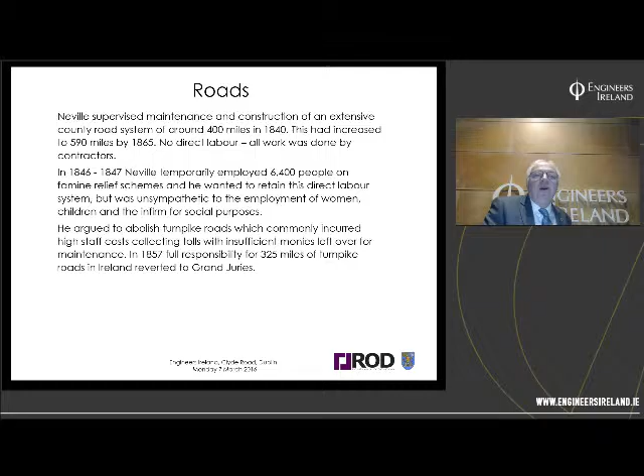He argued to abolish turnpike roads, which had high staff costs and usually insufficient money left over for maintenance. In the 1850s, responsibility for all remaining turnpike roads in Ireland reverted to the grand juries and individual county surveyors, so he was successful in that area. Now, the Irish road system was the subject of a quite interesting goods and passenger traffic survey in 1838.

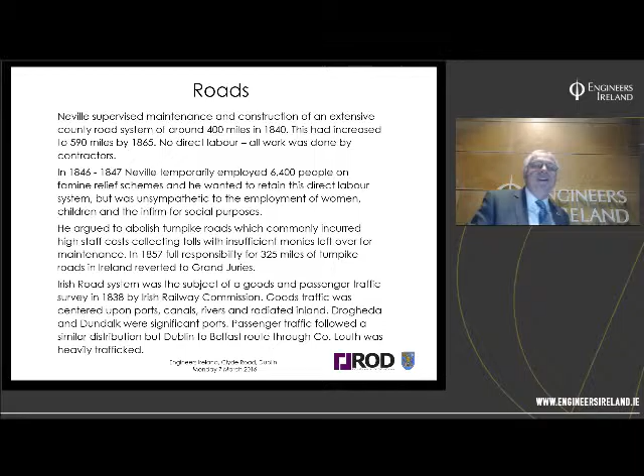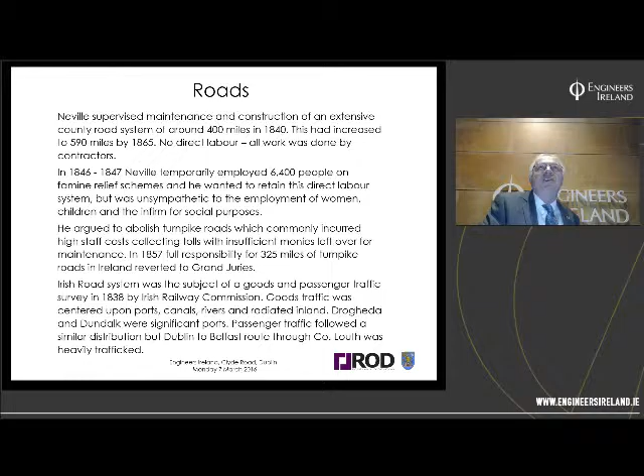This was by the Irish Railway Commission, and it gives a sense of what the status of Irish road traffic was like in the 1830s when Neville first took up his post.

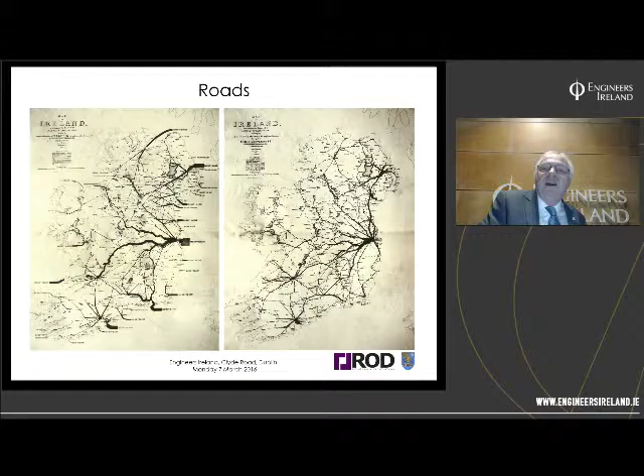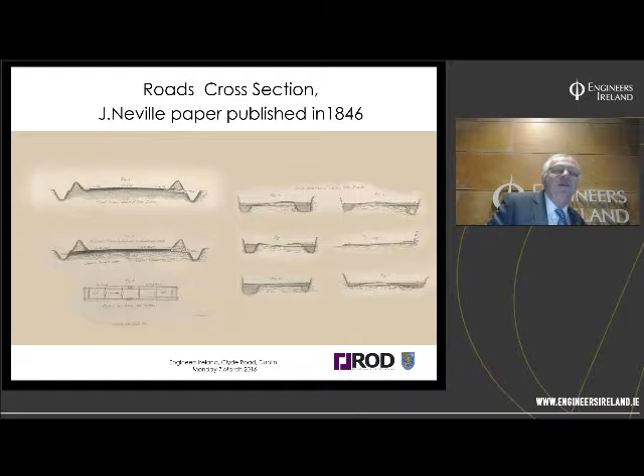Neville published some papers on road construction and how to maintain roads in 1846. He suggested that although currently a lot of roads were laid out with crossfalls of 1 in 24, about a 4% fall, he was arguing for crossfalls on the order of 1 in 48, about 2%. Any road engineers here would know that 2% is a common crossfall applied to current roads. So not much has changed in the 150 odd years since Neville proposed typical cross sections for roads.

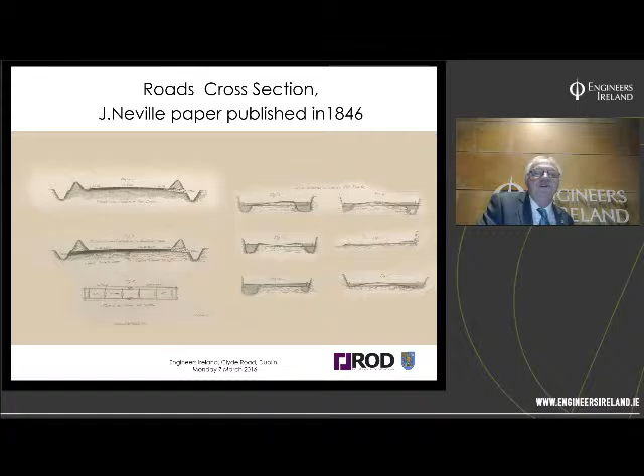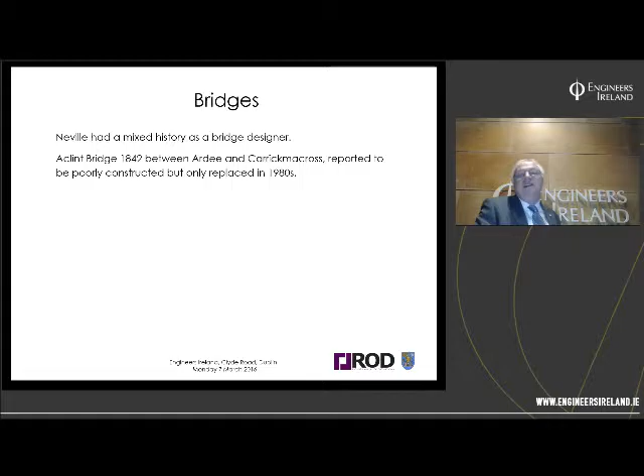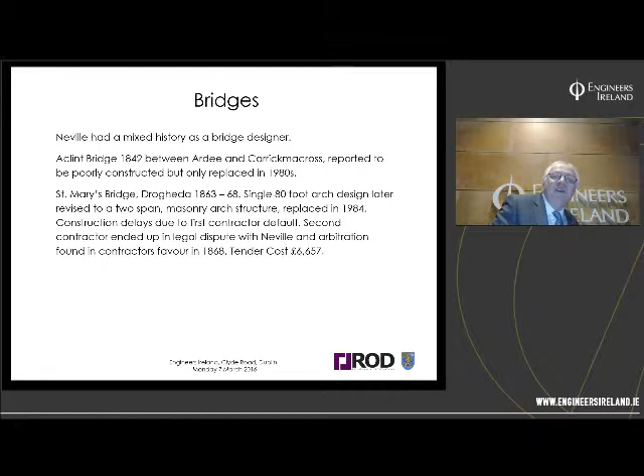Neville had a mixed history as a bridge engineer. An early bridge was constructed that was reported to be poorly built, but only replaced quite recently, in the 1980s. This was St. Mary's Bridge in Drogheda. He originally had a design for a 80-foot arch, quite a decent span for its day. This was later revised to a 2-span masonry arch structure and was only actually replaced in the 1980s. There were a lot of delays due to the first contractor defaulting. The second contractor ended up in legal dispute with Neville, and arbitration found in the contractor's favour. The tender cost of that bridge was nearly £7,000 in its day.

St Dominic's Bridge was another bridge, a rather crude timber bridge, replaced later in the 1890s by a steel structure, and that structure is still used by pedestrians to this date. He unsuccessfully competed for the new Carlisle Bridge in Dublin, built in the 1860s, now O'Connell Bridge.

This was a single span, 120 foot, 11 foot deep, wrought iron lattice girder structure designed by Neville, although it actually crossed between two counties, Louth and Meath. Neville was the only engineer acknowledged on the plaque on the bridge, so he is deemed the primary designer. It was built by a local contractor at a cost of £2,500.

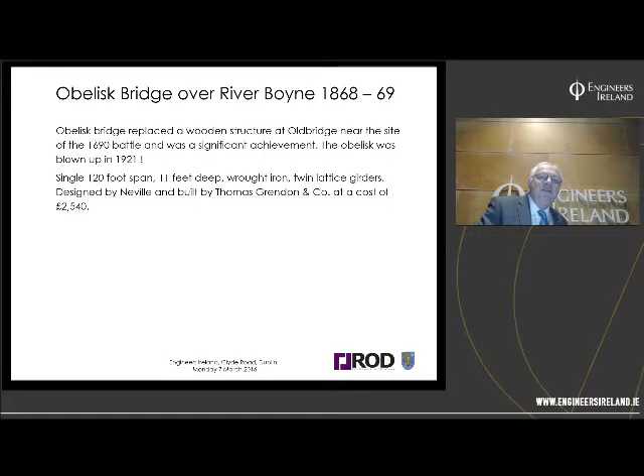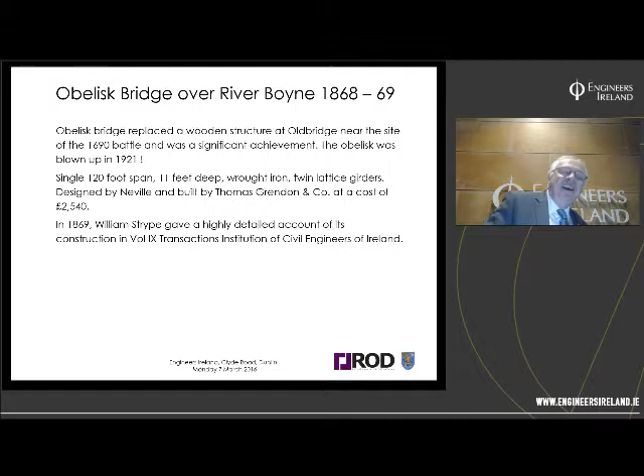There's a very detailed description and explanation given by William Strype in Transactions of the Civil Engineers of Ireland. If anybody has any interest in how exactly a lattice wrought iron Victorian bridge was constructed, you could do no worse than just read this. It's about an 18-page blow-by-blow, bolt-by-bolt account of exactly how it was built.

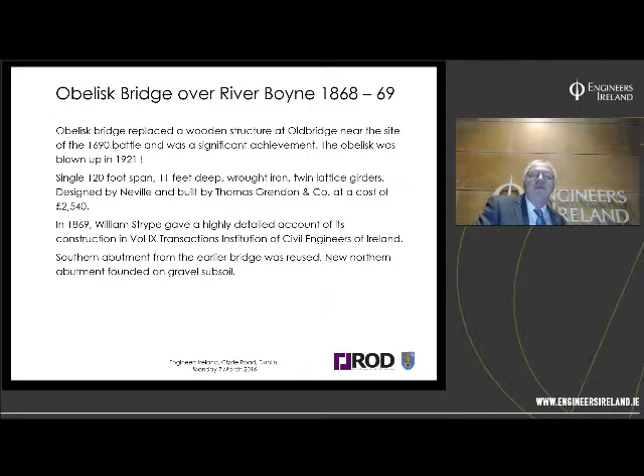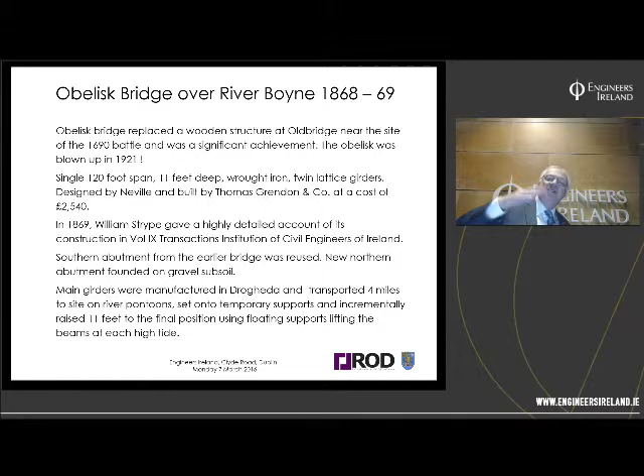The southern abutment was reused from the earlier structure, but the northern abutment was founded on gravel subsoils. Interestingly, the main girders were manufactured in Drogheda and transported on a barge 4 miles upriver on pontoons. They were set onto temporary supports, and the River Boyne was tidal at that location, so as the tide rose and lowered, they managed to incrementally jack up the system and raise it on temporary floating supports, lifting the bridge beams at each high tide. That's how the bridge beams were lifted into their final location.

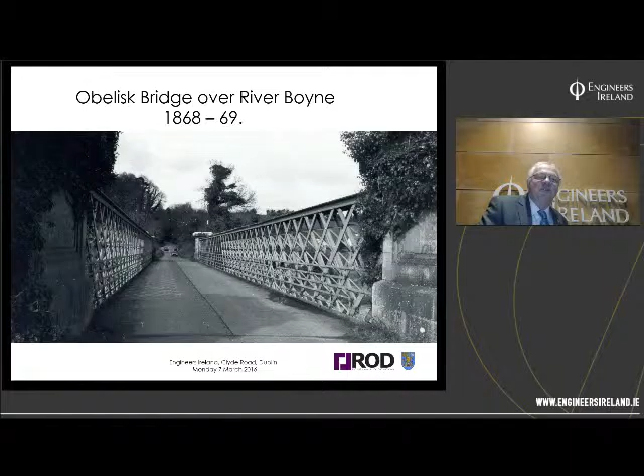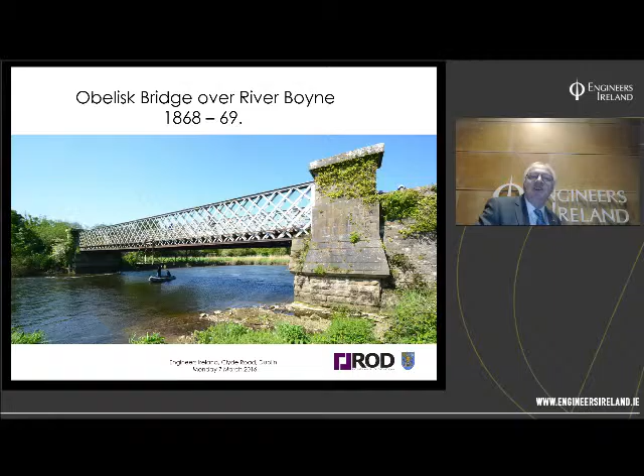Neville, unlike many other county surveyors, was not involved in the planning and construction of railways, unlike some county surveyors. Neville considered this a direct conflict of interest. He actually took legal action against railways on a couple of occasions to enforce reconstruction of railway bridges on the Dublin and Belfast Junction Railway in the 1840s.

John McNeill was the chief engineer, and very interestingly, at that time McNeill employed a young assistant working on the railways in Ireland, and his name was W.J. Macquorn Rankine. Mr. Rankine will appear later in the presentation.

Neville also opposed extension of railways into the quays at Dundalk, again arguing against the restriction of public access.

He didn't have a lot of luck with railways because in 1853 he was injured in quite a serious train crash near Straffan when the Cork-Dublin Express broke down and a goods train ran into the back of the passenger train that Neville was in. There were 16 fatalities and nearly everybody in Neville's carriage was killed. He was extremely lucky to survive with a broken leg and some other injuries.

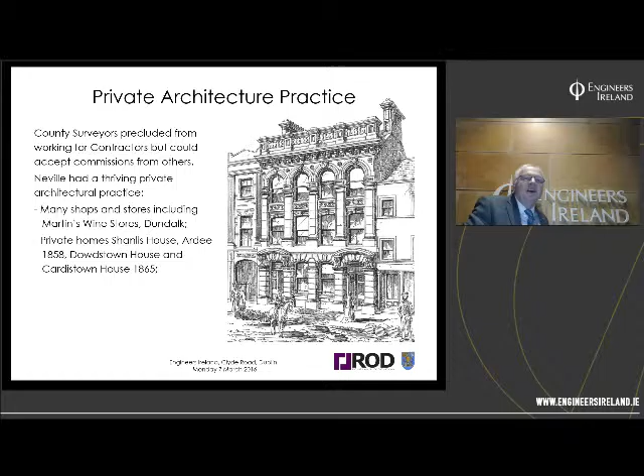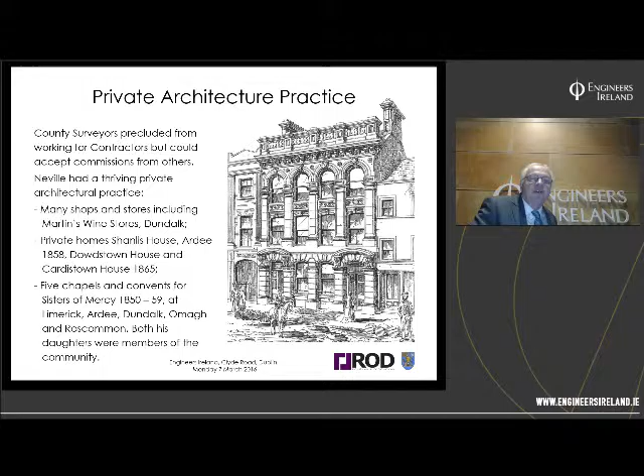He designed a number of shops and stores in Dundalk, including what was originally Martin's Wine Stores - this is a graphic of it, and this building stands to this day. He designed a number of private homes in County Louth: Shanlis House, Ardee, Dowdstown House and Cardistown House in the 1860s. He also designed, as architect, 5 chapels and convents for the Sisters of Mercy in various counties, and of course both his daughters were members of that religious community. This is a graphic of one of the convents of Mercy in Ardee.

He made a number of contributions to civil engineering education through his publications. When Neville was appointed, engineering schools were just beginning to be formed - an engineering chair in Glasgow in 1840, Trinity College Dublin in 1842. So civil engineering education was just getting going, and Neville came in slightly before there was a formal education. It caught the next generation after Neville, but not Neville himself. Many of those involved in civil engineering design basically read books, read papers, Encyclopedia Britannica - these were standard sources of information for its day.

Neville made a number of contributions through publications. He wrote a short paper on water pressures on cofferdams, and the paper that Trevor will talk about in far greater detail in the first Transactions of this Institution on earth pressure. He also did a graphic on road cross sections I gave earlier. He published a successful work, reprinted twice in London, on hydraulic tables, coefficients and formulae for discharge of water, and another hydrodynamics pamphlet in the 1850s. So his interests were quite broad, not just in roads but also hydraulics.

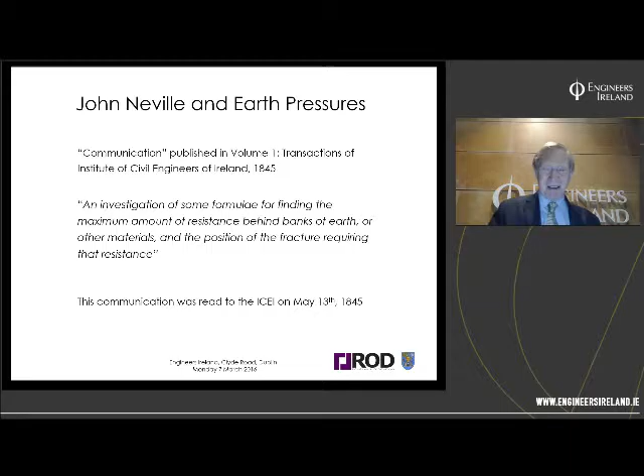I'm going to look at his contributions in the area of earth pressures as a sort of geotechnical engineer. He published this report we mentioned earlier, a communication in Volume 1 of the Transactions of the Institution of Civil Engineers of Ireland in 1845, called 'An Investigation of Some Formulae for Finding the Maximum Amount of Resistance Behind Banks of Earth or Other Materials, and the Position of the Fracture Requiring that Resistance.' It was read to the institution on May the 13th, 1845. I'm not sure if it was a Friday, but anyway, that's when he read it.

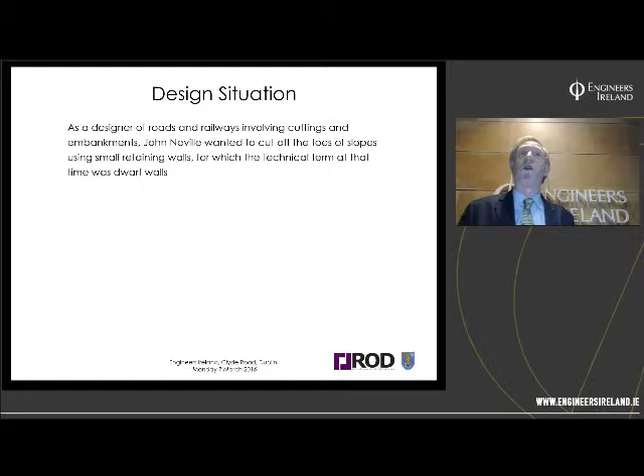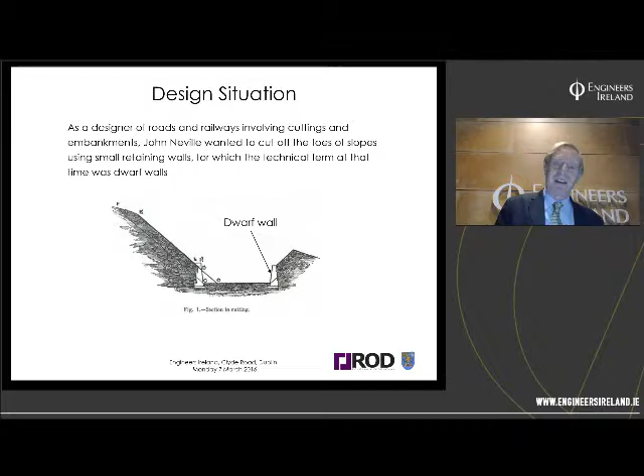Now, the design situation he was involved in—he worked a lot with cuttings and embankments, and he wanted to cut the toes of slopes using small retaining walls, for which the technical term at that time was 'dwarf walls.' So you have your cutting, and the dwarf wall is the little wall that gives you a bit more, reducing the amount of earth and increasing the cutting. The advantages of dwarf walls: they act as fences, the land required is reduced, there's less earthwork, and the toes of the slopes are neatly defined, protected and permanent. In those days this was important in districts where cattle or swine abounded, according to his paper.

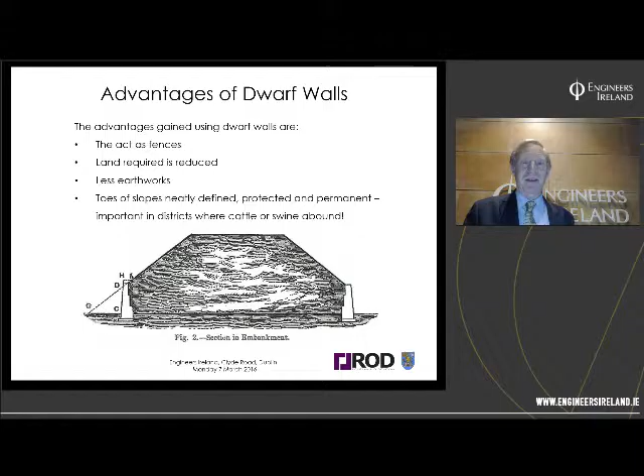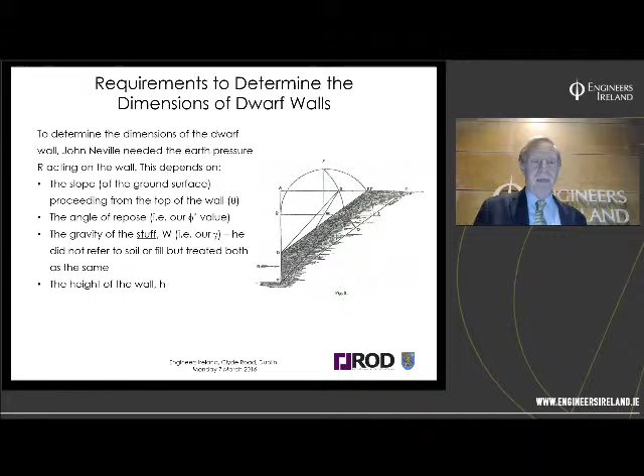Now, to determine the dimensions of the dwarf walls, John Neville needed the earth pressure R acting on the wall. This depends on the slope of the ground surface proceeding from the top of the wall—that's the angle theta; the angle of repose, our phi dash value; and the gravity of the material, W, in other words our gamma value. He didn't refer to soil or fill separately, but treated them both the same. The other parameter he needed was the height of the wall, and the height of the slope within certain limits—so there was the overall height and the height of the wall. But the problem was he didn't show any of his parameters on his figures—he has a lot of labels, but no parameters shown.

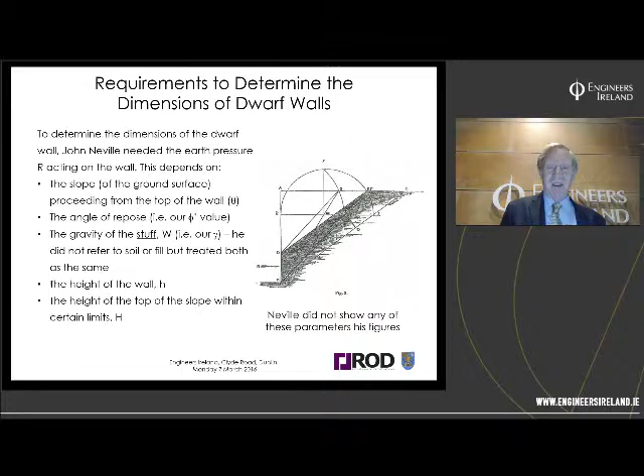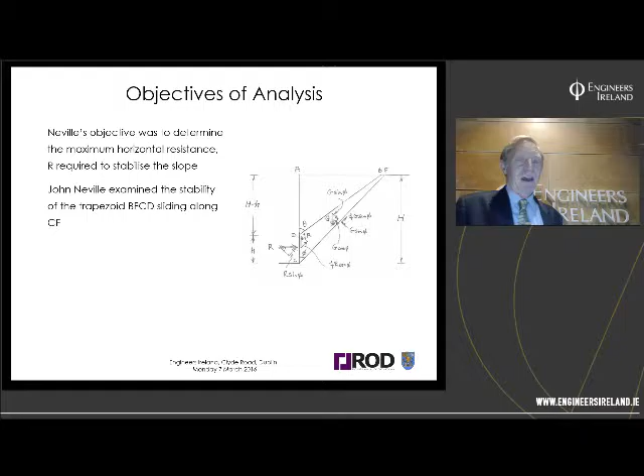Now, the objective of the analysis was to determine the maximum horizontal resistance required to stabilize the slope. And he examined the stability of a prism, BFCD.

So BFCD was the prism he was trying to analyze. Basically he had two triangles, that one there minus that one there. He was analyzing the stability of that, sliding along the failure plane, going up from there, C to F. So that was his failure plane, and the slope of the failure plane is phi. And it's not obviously our friction angle.

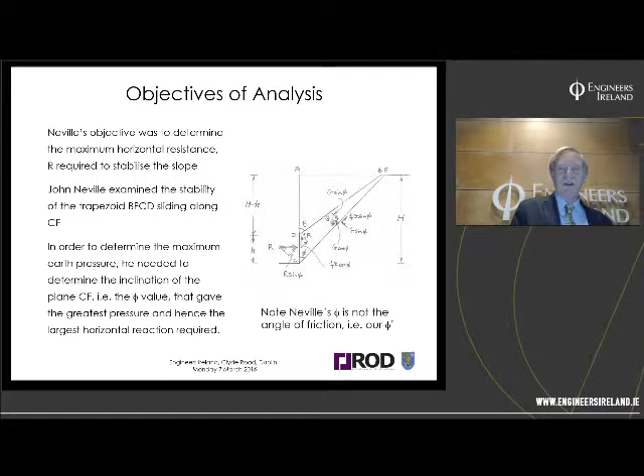We now call that our friction angle. So he was using the same symbol for something different in those days, which again causes a bit of confusion when you're trying to read it nowadays. So note, Neville's phi is not the same as our angle of friction, which I've called in the rest of this presentation phi dashed to avoid the confusion.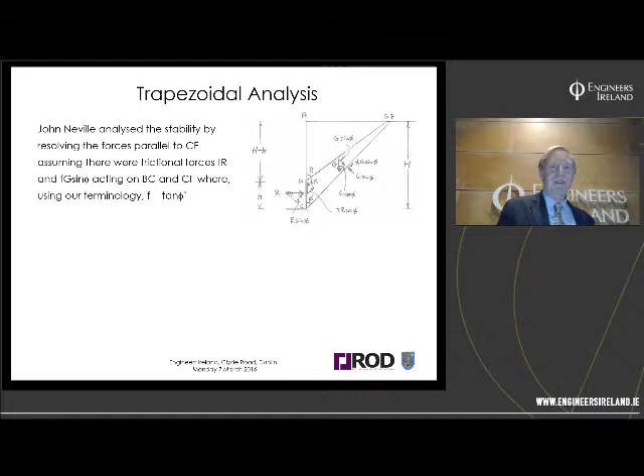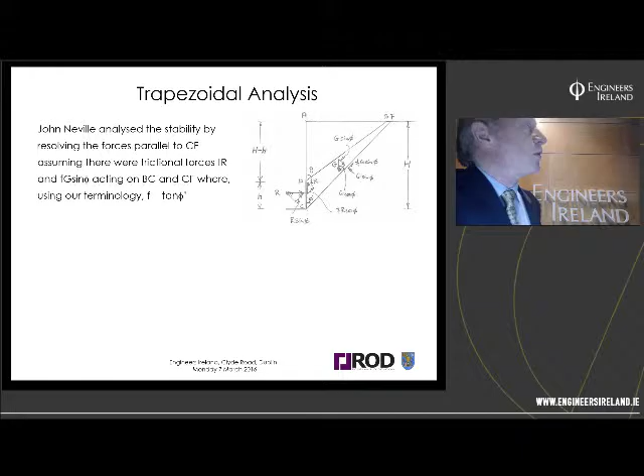Now, the trapezoidal analysis. He assumed in his analysis that there was friction on that slope and also behind the wall, and he had an angle of friction, F, or coefficient of friction, F. That's what that F is there and the F there. So we then resolve those forces parallel to that plane there to get equilibrium in that direction, and he got that equation. So you got the two components of that, and that force there and that force there, giving the equilibrium equation.

And resolving it to get the equation for R, which he's trying to calculate, you get this equation: G times 1 minus F tan phi over F plus tan phi. Now, since he needed the maximum earth pressure, he differentiated that R with respect to his phi angle, the inclination of the failure plane, and he gets this equation: tan squared phi plus 2 tan phi equals Fm plus m over F minus 1.

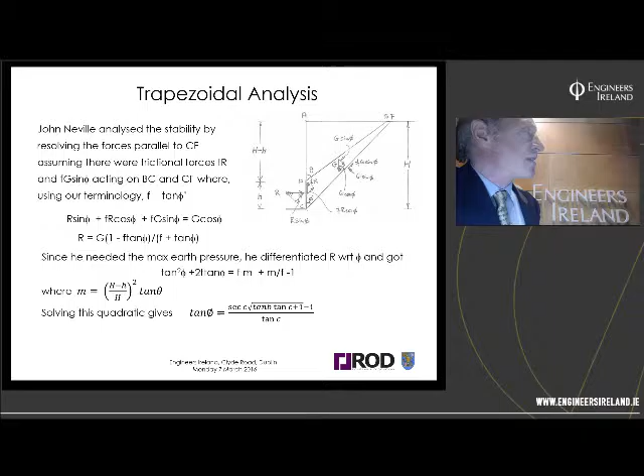Now, the equation for m is h minus h squared over h, minus h over h all squared, times tan theta. So m is a function of theta, and if you're going to be differentiating this, geometrically it gets quite complicated. But solving the quadratic equation here, he gets this equation for tan phi. Again, he was a great one for trigonometric functions.

Sec theta tan b times square root of tan b tan c plus 1, minus 1 over tan c. And he made a substitution here: tan b is equal to m, which is like what we had before. So tan b equals h minus h squared, h minus h over h all squared, times tan theta. And c then is the complement of the angle of repose, so that tan c up here is 1 over f, 1 over tan phi.

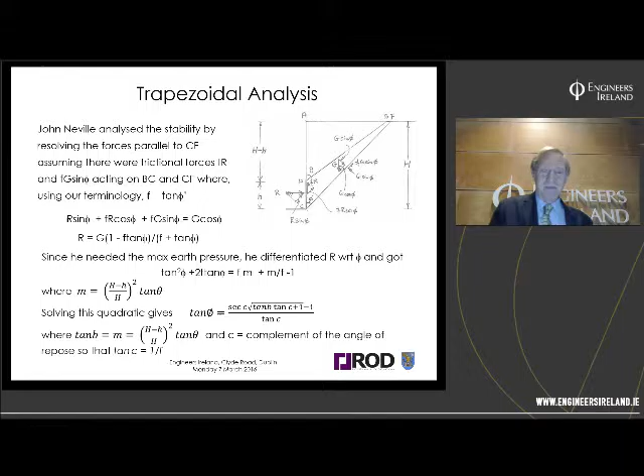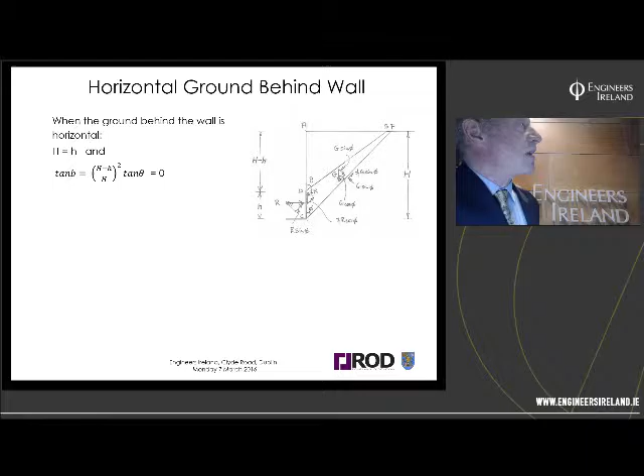And if the ground happens to be horizontal behind the wall, so we bring our h up to the full height, then h is equal to h, and tan b then becomes 0, because you get tan theta of 0, so that becomes 0. And the equation for tan phi, which you're trying to find, reduces to this: tan phi equals sec c minus 1 over tan c.

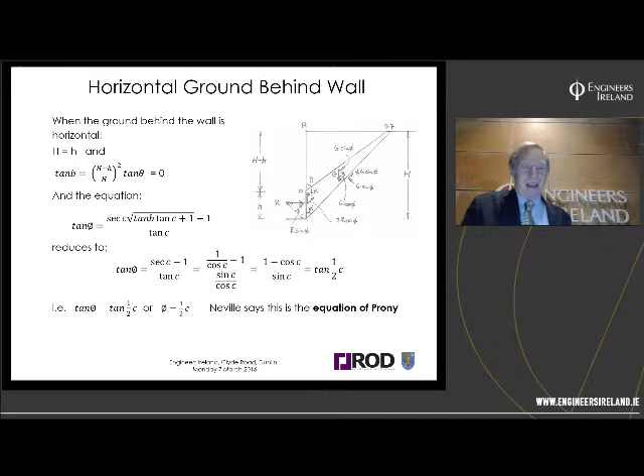Now, he's a great man for his trigonometric identities as well, so he knew that that gave him tan 1/2 c, which is the complement of the angle of friction. And if tan phi is equal to tan 1/2 c, then phi is equal to 1/2 c. And he says in his paper that it's the equation of Prony, and it's the inclination of the plane, CF, giving the maximum value of R, the active earth pressure.

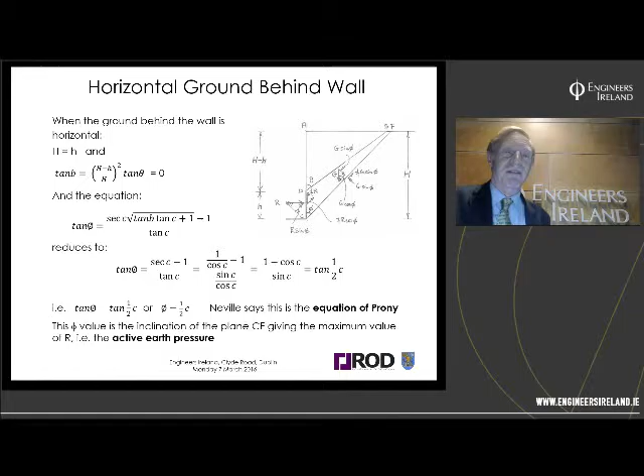So how does that then compare to what we have today? Or who was Prony? Well, first of all, let's look at Prony. Who was he and what was his equation? Prony, Gaspard de Prony, born in 1755 and died in 1839.

So a lot of things were happening in engineering around this time, the end of the 1700s, beginning of the 1800s. He was one of the founders of the École Polytechnique, and the first professor of mechanics in that school, and in 1798 he became the director of the École des Ponts et Chaussées. His two books on hydraulics and one on mechanics were widely used in French engineering schools. So the engineers who set up engineering schools, their equations obviously were known outside of France. Maybe they not only spread the revolution, they also spread engineering throughout the world, it seems.

And then in an elementary course in civil engineering by M. Sganzin, he states: Prony demonstrated in his Mécanique, and formerly in his memoir printed in 1802 for use of students, that the position of the differential prism at maximum pressure is such that the inferior surface makes with a vertical line an acute angle, which is equal to half the angle the Earth naturally takes.

Now that confused me a bit at the time, because he makes with the vertical an acute angle. So he's talking about this angle up here, the phi angle. It's equal to half the angle the Earth naturally takes. Well, the Earth naturally takes an angle we would call phi dash, but what he meant was angle to the vertical. So he meant the half c there.

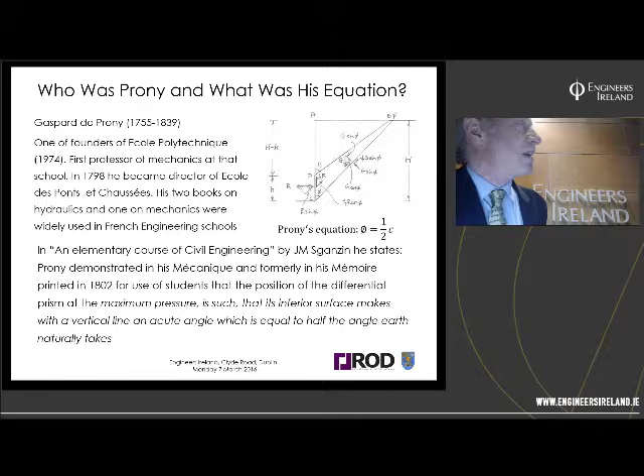So he's referring to the angle, and that's Prony's equation. Phi is equal to half c. So he's really talking about half the angle with the vertical.

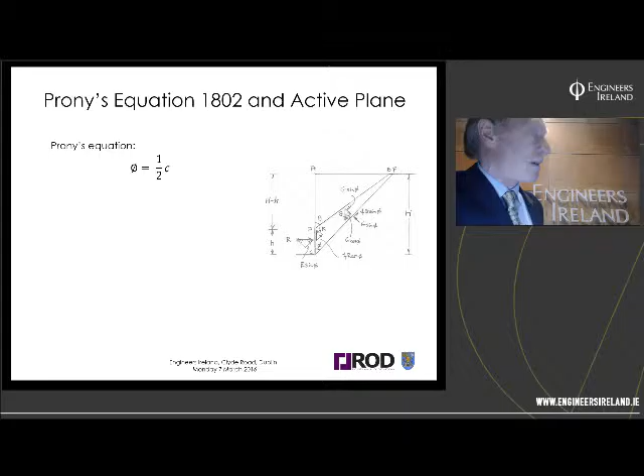Now, if we take this angle, how does it work out with the orientation of the friction plane? Phi is equal to half c. So expressed in our commonly used symbols today, with alpha for the inclination of the slope from the horizontal and phi for the angle of friction, that gives us...

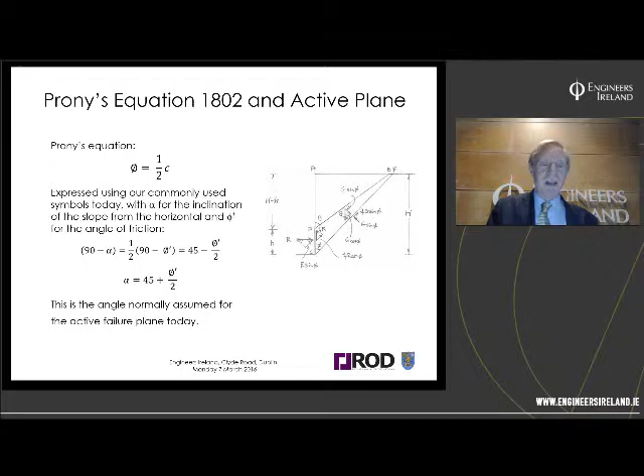90 minus theta, or 90 minus alpha, is a half of 90 minus phi, and that's equal to 45 minus phi over 2. If you rearrange that, you get alpha is equal to 45 plus phi dash by 2. And that's the expression used today you expect to get for your failure surface, 45 plus phi dash by 2. If you did a triaxial test, you'd expect to get the slope failure at that angle. So this is the angle normally used today for the effective angle, the active angle of failure.

Now Coulomb, in 1776, was a French physicist. He's probably better known for his work on electricity, Coulomb's law, and other areas, but he was also involved in geotechnics.

In 1764, he was sent to Martinique in the West Indies, where he was put in charge of building a new Fort Bourbon. And he published his paper, Essai sur une application des règles de maximis et minimis à quelques problèmes de statique relatifs à l'architecture. I think there should be a few accents in that. I copied it without, and the one I copied it from had no accents on it, but we'll leave it.

And this is the first study of the problem of lateral earth pressure on retaining walls published anywhere that used limit equilibrium theory, considering the failing soil block as a free body to determine the limiting horizontal earth pressure. In other words, to use a wedge analysis, which Neville used not long after that.

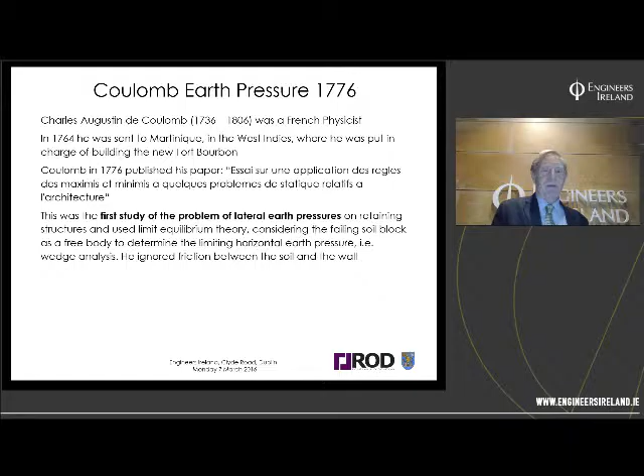But he, in his analysis, ignored the friction between the soil and the wall. Also, his paper was not very readable. He used lengths rather than angles, so it was very intractable.

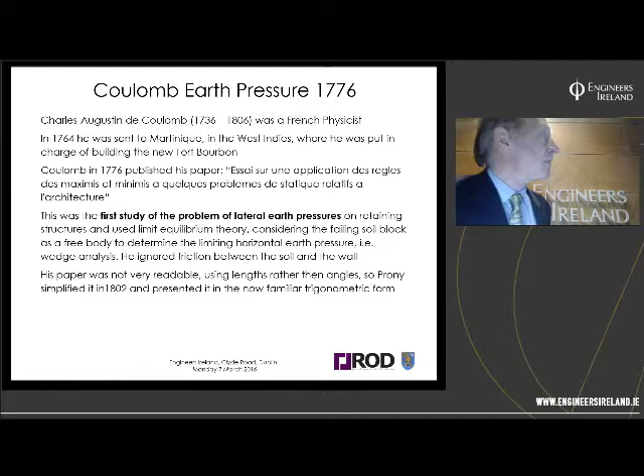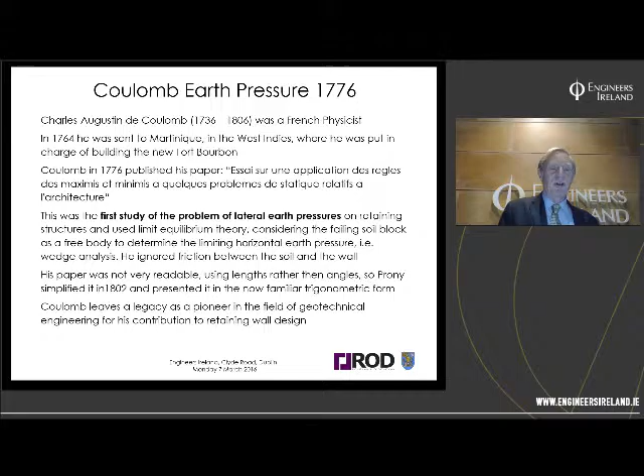And Prony, who took up his work, simplified it in 1802 and presented it in the now familiar trigonometric form. But Coulomb leaves a legacy as a pioneer in the field of geotechnical engineering for his contribution to retaining wall design. And his name is one of the 72 names inscribed on the Eiffel Tower.

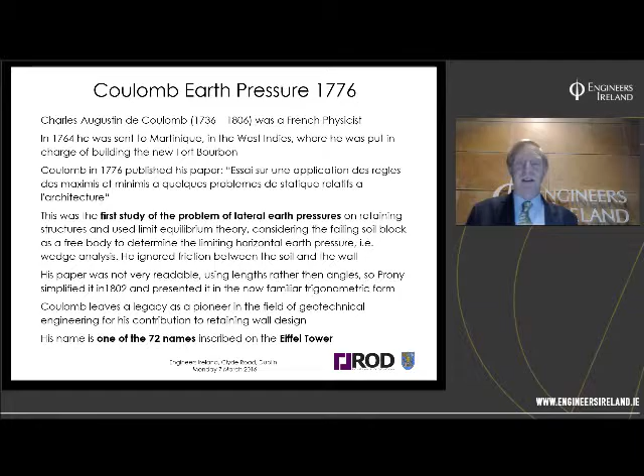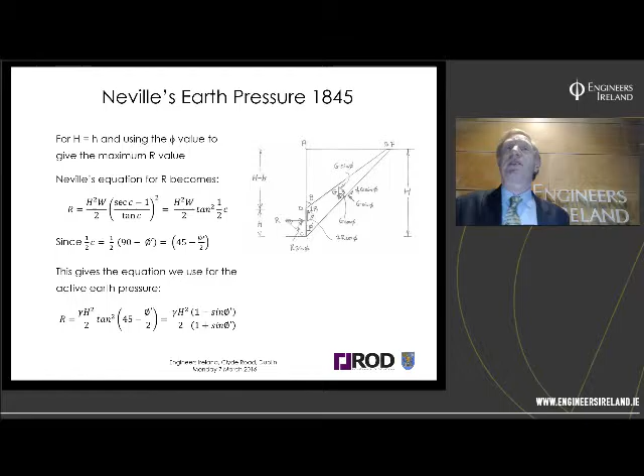And since half c is equal to 45 minus phi dash by 2, this gives us the equation we're familiar with for the active earth pressure, which is R equals a half gamma h squared, tan squared 45 minus phi dash by 2, or gamma h squared over 2, 1 minus sine phi over 1 plus sine phi, which is the normal Ka, the equation for Ka, the coefficient of earth pressure, still used today.

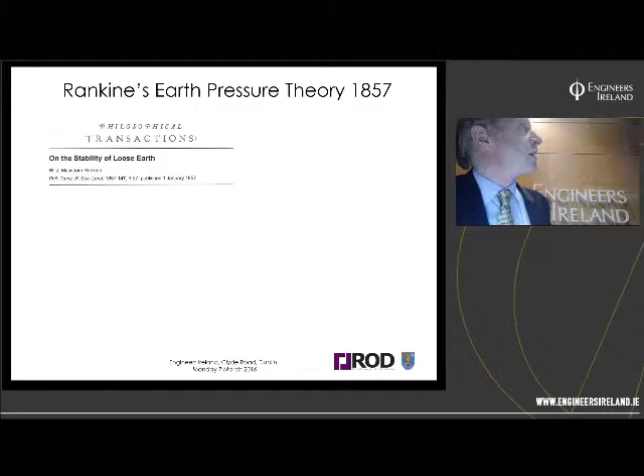Now Rankine, who was mentioned earlier by Fintan, produced his earth pressure theory in 1857. That was after Coulomb and after Neville produced his. And he published his earth pressure theory in this volume on the stability of loose earth in the Transactions of the Royal Society of London. And the general principles are set out there.

And basically what he was looking at, if you look at the principle at the bottom there, he was treating the resistance to displacement by sliding along a given plane in a loose granular mass as equal to the normal pressure exerted between the parts of the mass on either side of that plane, multiplied by a specific constant. So he wasn't looking at wedge analysis.

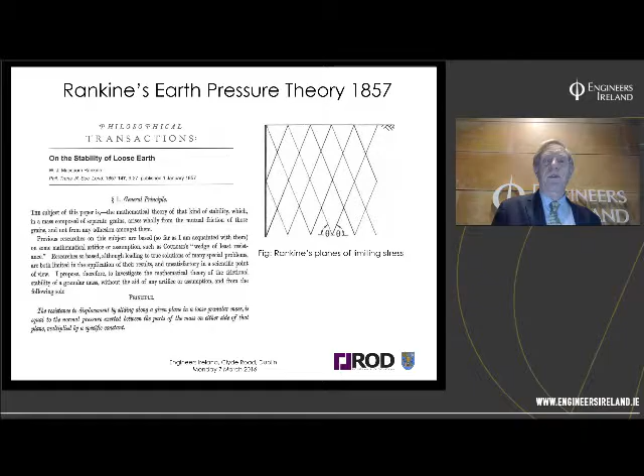He was looking at planes of failure, homogeneous planes of failure through the system, planes of limiting stress. Rankine's equation for the active earth pressure is R equals gamma h squared over 2, times 1 minus sine phi, over 1 plus sine phi.

Now that's what Neville got earlier. So I wonder, when Rankine was in Dundalk and maybe met Neville, was there any communication between them? Was there any link between those two equations? Unfortunately, I don't think we can ever prove it, but it's interesting to think that maybe Neville did contribute to what Rankine eventually published only a few years later.

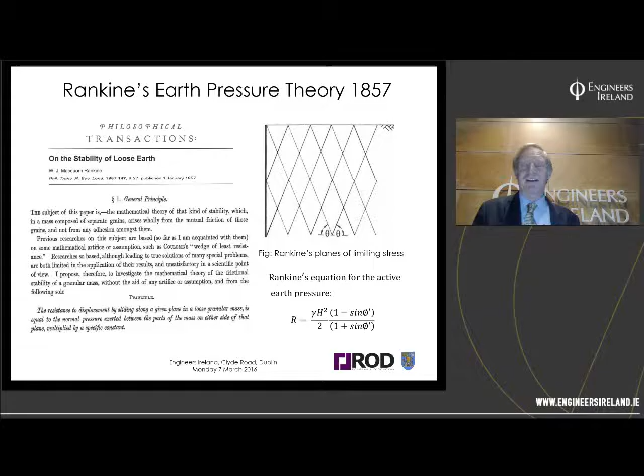Now, the angles of repose. Neville says that most materials in a loose, dry state have angles of repose, in other words angle of friction phi dash between 34 and 40 degrees. A material stands on slopes between 1.25 to 1 and 1.5 to 1, in other words nearly 33.7 degrees to 38.7 degrees.

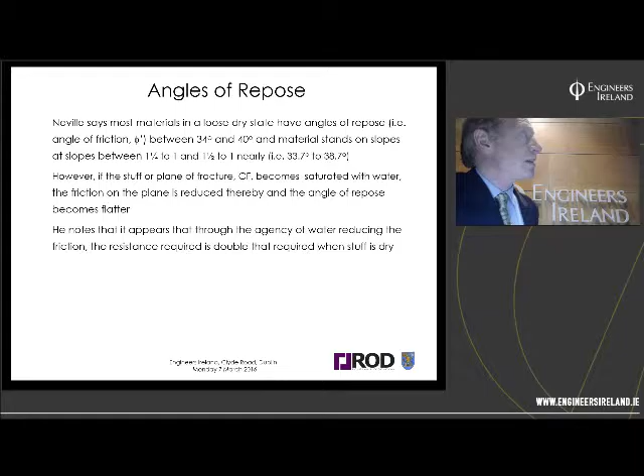However, if the stuff, or plane of fracture, in other words CF, becomes saturated with water, the friction on the plane is reduced thereby, and the angle of repose becomes flatter. He notes that through the agency of water reducing the friction, the resistance required is double that required when the stuff is dry. So he was writing in his paper in 1844 that the angle of friction was reduced by half.

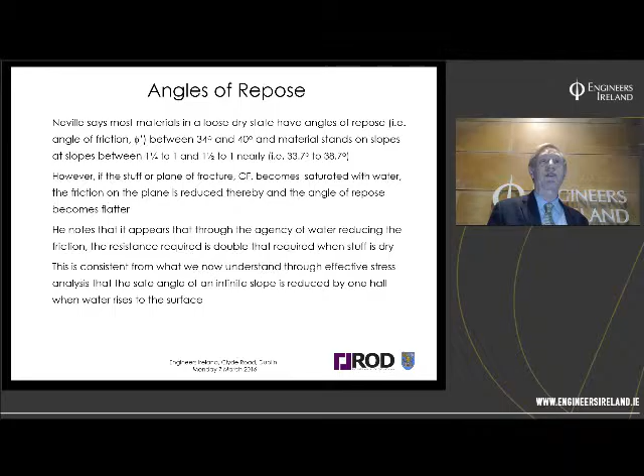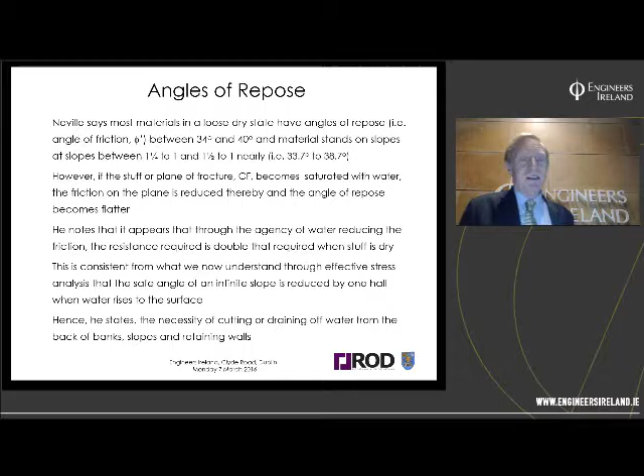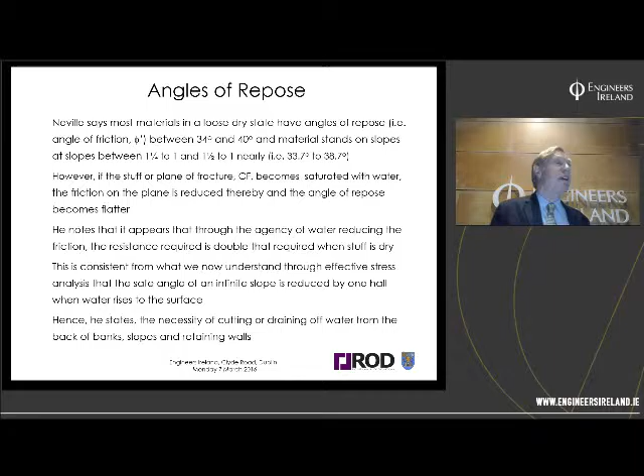And this is totally consistent with what we now understand through effective stress analysis, that the safe angle of an infinite slope is reduced by approximately one half when the water rises to the surface. Design engineers would take that into account. Hence, he states the necessity of cutting or draining off water from the back of banks, slopes, and retaining walls. Certainly all geotechnical engineers today would be very cognizant of that and very careful to do that.

So he certainly was ahead of his time, and certainly had good engineering judgment and good knowledge.

Now he refers in his paper to the Rossberg Great Fall. So I went to the internet to find exactly what that was. He said it was an example that proved his theory. Neville said springs are the most general cause of landslips, and as an example refers to the great fall of the Rossberg in Switzerland in 1806.

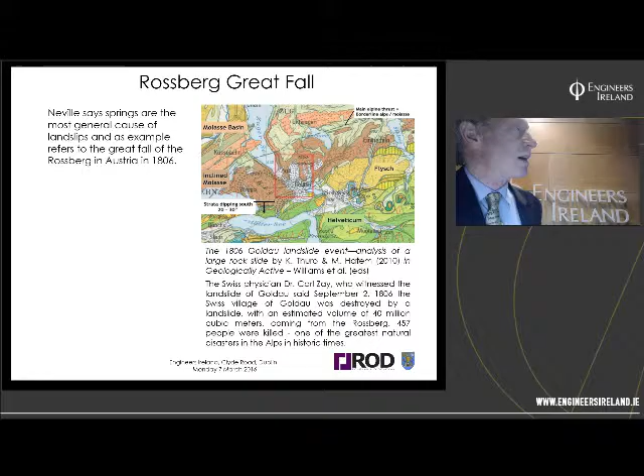So that's a map of Austria, or a map of the part of Austria where the Rossberg failure occurred. It was at this place called Goldau, the 1806 landslide event. This map and report was from a paper published not so long ago, 2010, by Thuro and Hatem in Geologically Active, a volume edited by Williams et al.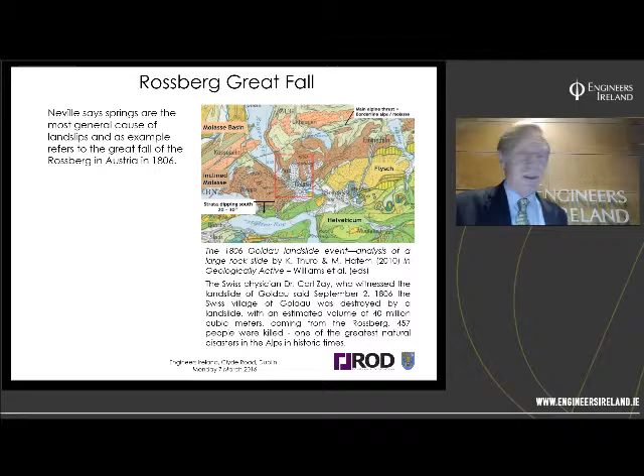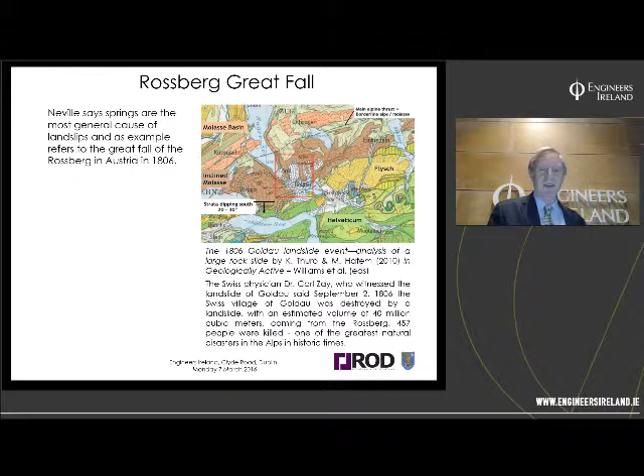And in that they say that the Swiss physician, Dr. Carl Zay, who witnessed the landslide of Goldau, said on September the 2nd, 1806, the Swiss village was destroyed by a landslide with an estimated volume of 40 million cubic meters coming from the Rossberg, and 457 people were killed. It was one of the greatest natural disasters in the Alps in historic times.

Then going back to Neville, he quotes Phillips' geology, saying this was a case where water entered and moistened a particular layer of strata, all inclined very highly, so as to acquire a descending force, and the cohesion of the part was weakened by the interposed moisture. He then states, water lubricates fissures.

Now I think most people would be horrified to see that these days, but maybe in his day that's acceptable. Water lubricates fissures, decreases friction, that's certainly true, and increases the value of R. So that was an interesting situation there.

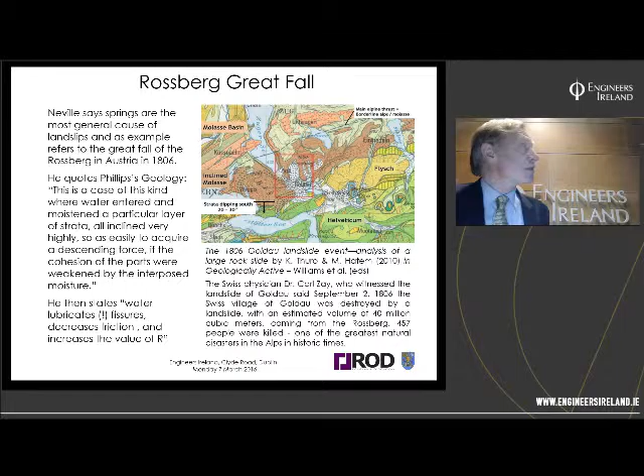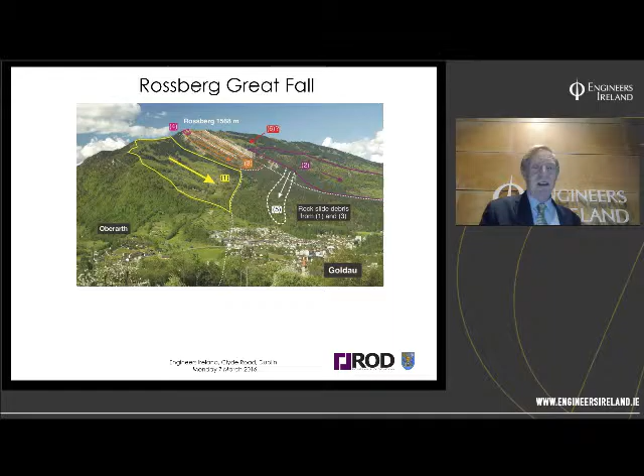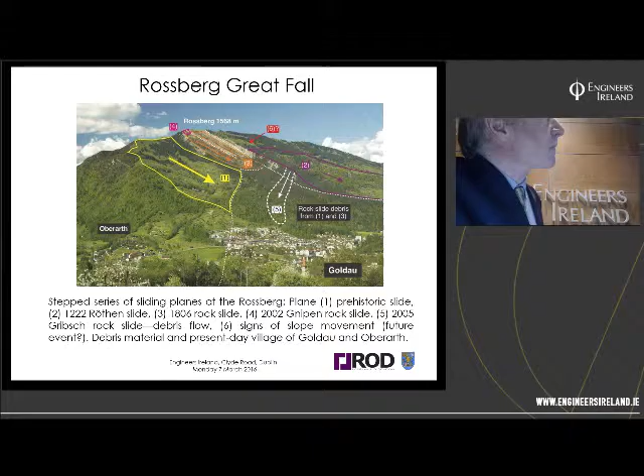That's a picture of the Rossberg Great Fall itself. You see there have been several falls on that case. There's the prehistoric slide, and the one that was his, the 1806 one, is number 3, that brown one up there. That's the one that occurred in 1806.

And then the poor town, I think it's buried down there, Goldau.

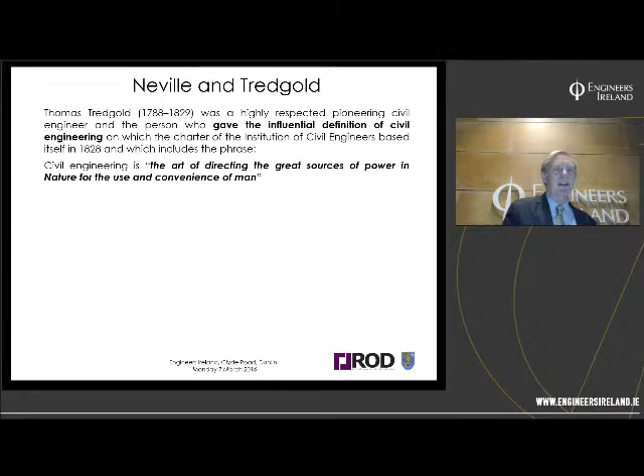Now, Neville and Tredgold. Thomas Tredgold was a highly respected pioneering civil engineer and the person who gave the influential definition of civil engineering on which the Charter of the Institution of Civil Engineers based itself in 1828, including the phrase: civil engineering is the art of directing the great sources of power in nature for the use and convenience of man. So obviously Tredgold was a very eminent, respected man in his time, but as Fintan has said, Neville was not averse to criticising his peers.

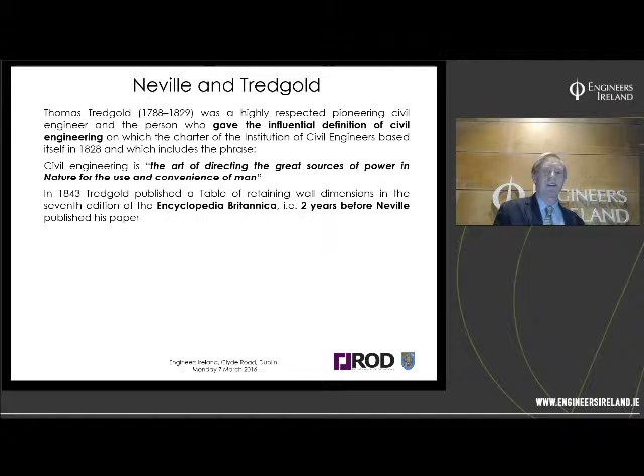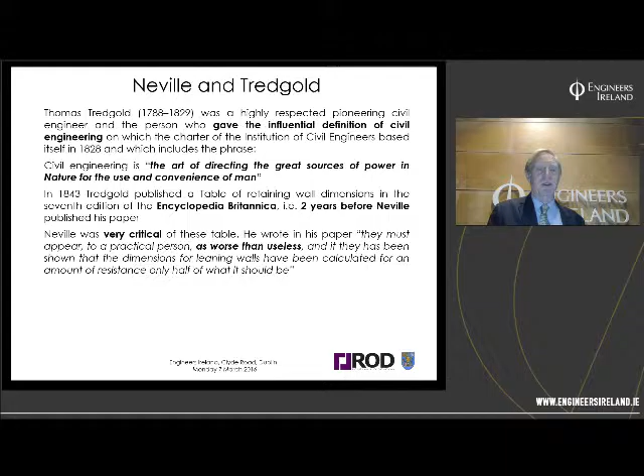In 1843, Tredgold published a table of retaining wall dimensions in the 7th edition of the Encyclopaedia Britannica, two years before Neville published his paper. Neville was very critical of these tables. He wrote in his paper that they must appear to a practical person as worse than useless, and it has been shown that the dimensions for leaning walls have been calculated for an amount of resistance only half what it should be.

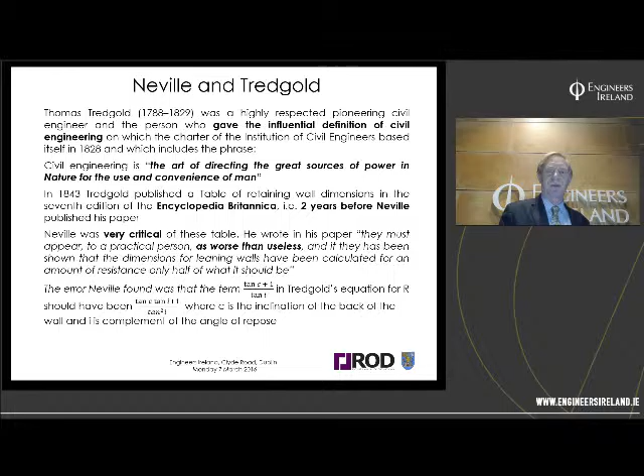So he felt he had to write something and put things to order. He published it, and in his paper to the Royal Irish Academy, subsequent to the one to the institution here, he identifies the error: that the term tan C plus 1 over tan I in Tredgold's equation for R should have been tan C tan I plus 1 over tan squared I, where C is the inclination of the back of the wall and I is the complement of the angle of repose. So he wasn't afraid to take on the most eminent people in his profession at the time.

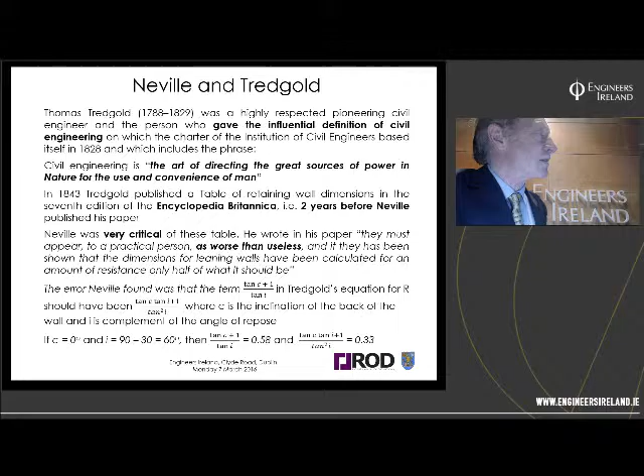If you take an example, say when C is 0 and I is equal to 90, or I is equal to 90 minus 30, giving 60, then if you use Tredgold's equation, you get 0.58, whereas if you use the correct one that Neville gets, it's 0.33, and that's where the difference of about a half occurs in the calculations. It's more complicated than that because there are various other factors involved in the calculation.

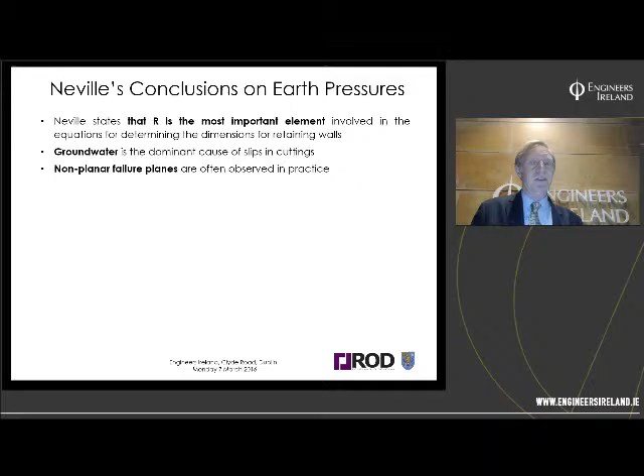So Neville's conclusions on earth pressure: he says that R is the most important element involved in the equations for determining the dimensions of retaining walls. Groundwater is the dominant cause of slips in cuttings. Non-planar failure surfaces are often observed in practice. When stuff is tipped into an embankment, the angle of repose is least, and when adhesion and consolidation take place, it is greatest. He noted the dangers of surcharge loading to the stability of quay walls and cut slopes.

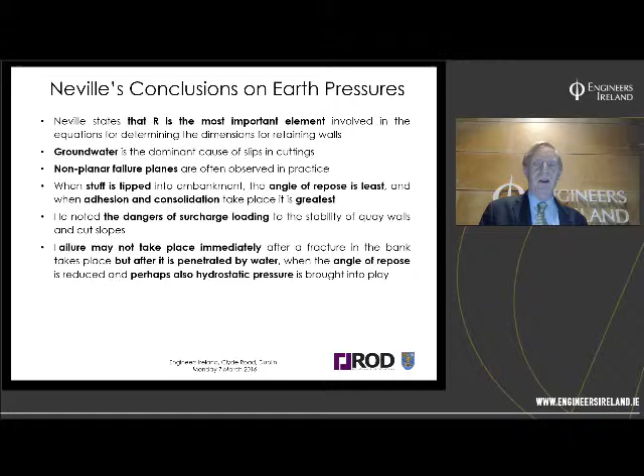Failure may not take place immediately after a fracture to the bank takes place, but after it is penetrated by water, when the angle of repose is reduced, and perhaps also hydrostatic pressure is brought into play. Hence the necessity of taking the maximum value of R and the prudence of the engineering maxim 'stronger than strong enough.' So he obviously always believed in having a factor of safety, stronger than just strong enough. All these demonstrate an impressive insight into the real behavior of soils and could be made by any geotechnical engineer probably working today.

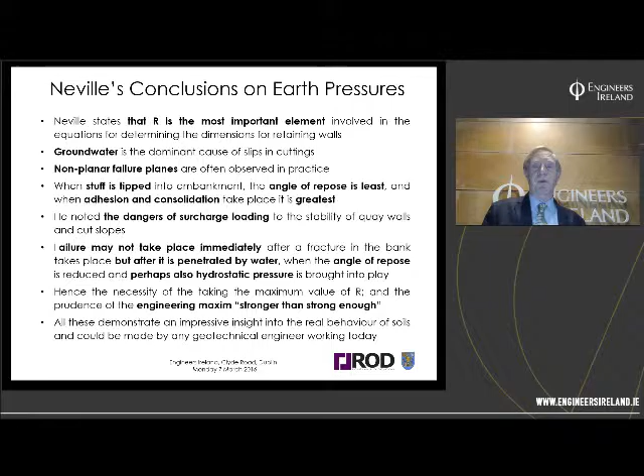So summarizing him as an engineer: he was a very distinguished engineer and one of the longest serving county surveyors. He was involved in design and construction of many public works, including roads, bridges, and public buildings. He operated a successful architectural practice. He had a very good understanding of engineering principles. He was aware of recent engineering theories from Paris and what was happening in Europe, for example in Austria. His mathematical and analytical skills were very good, and he contributed to the early civil engineering education and continuing professional development through his publications.

That is really all I want to say. I just want to put a few acknowledgements: Ron Cox, who instigated the research in 2002 and provided photographs of the Obelisk Bridge. Engineers Ireland, the Royal Irish Academy, and the Institution of Civil Engineers, who all provided copies of historical papers from the libraries. John Neville, County Louth Surveyor, from Christine Casey, in the Journal of the County Louth Archaeological and Historical Society, and Irish County Surveyors 1834 to 1944 by Brendan O'Donoghue. Thank you.